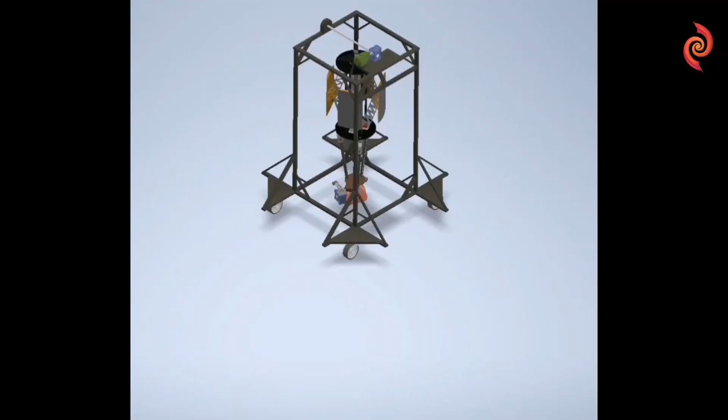Our Mission Oil Scavenging Bot consists of two main units, namely a standing unit and a drone unit. The standing unit is the one which supports the drone unit, and the drone unit is the one which gets inside the manhole, inspects the environmental condition, and is helpful in removing sludge or blockage in the manhole without any human intervention.

Standing unit, as you can see here, is the rectangular frame which supports the drone unit. Drone unit is the unit which enters the manhole and inspects the environmental conditions inside the manhole.

As our drone unit is suspended with a cable from the standing unit, there might be some oscillations during operation. In order to overcome these oscillations and for proper stable operation of the drone unit, a jack-like structure is used. Our jack consists of 4 limbs which provide stability by opening itself.

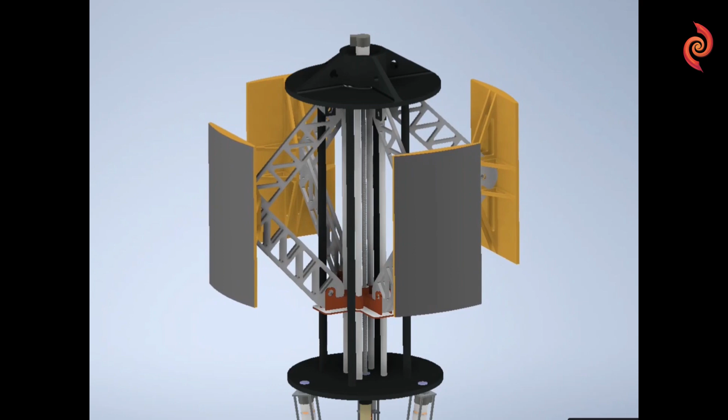Our jack consists of 4 limbs and operates through a lead screw mechanism. Once the jack enters the manhole, the lead screw rotates clockwise and all 4 limbs of the jack try to expand and get attached to the inner wall of the manhole.

In order to check whether the limbs have got fixed properly, a force sensor is used at the end of the limbs. When the limb touches the inner wall of the manhole, the force sensor at the end of the limb experiences certain pressure. This pressure, on crossing a certain threshold, gives an indication to the operator that the jack has got fixed.

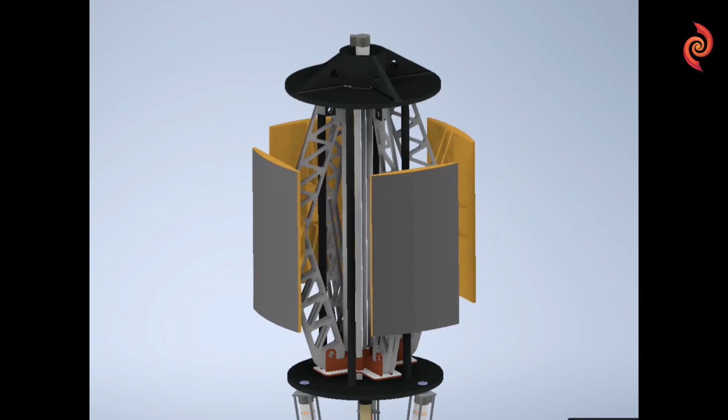On the other side, during retraction, when the drone unit is being taken out, the lead screw rotates anti-clockwise and hence all the limbs contract. In order to indicate to the operator whether the contraction of limbs has been done successfully, limit switches are used here.

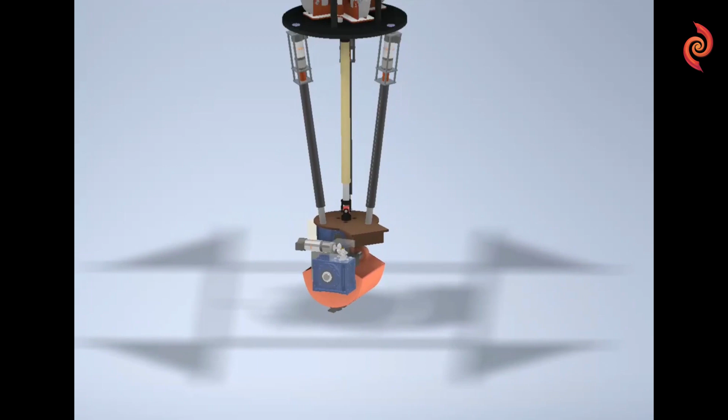This is the parallel manipulator of Mission Oil Scavenging Bot, which consists of 3 links, each link driven by a high torque N20 motor with an encoder for PID position feedback control.

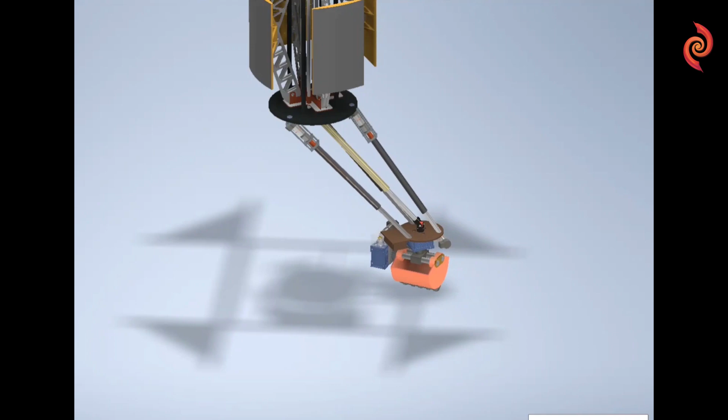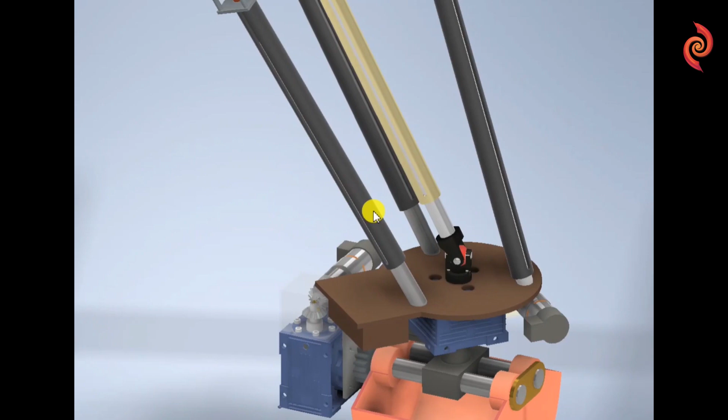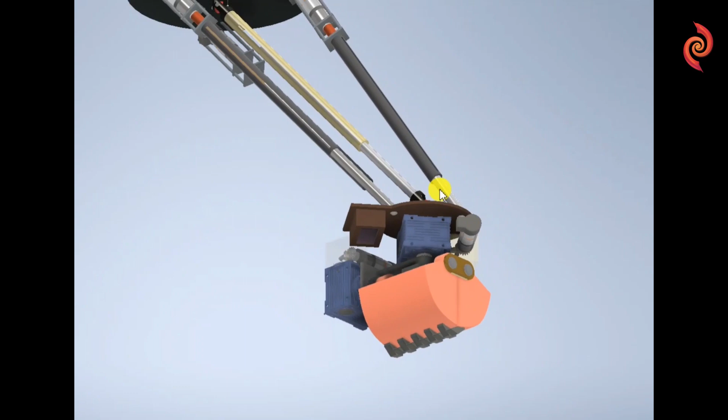This works on the basis of inverse kinematics, in which the desired position where the end effector should be is fed by the operator as an input, and the amount by which each link's length has to be changed is given as output. The result of inverse kinematics is then given to the N20 motors as input through PID control coding. Hence, each N20 motor spins at a different RPM and the lead screws connected to each N20 motor spin differently, thus achieving the target position entered by the operator.

To be brief, the links will expand or contract according to the operator's input, thus achieving the necessary linear or tilting motion and hence providing 5 degrees of freedom for the Mission Oil Scavenging Bot.

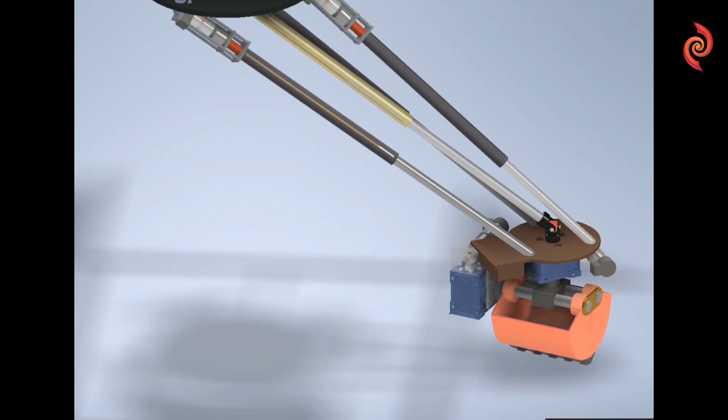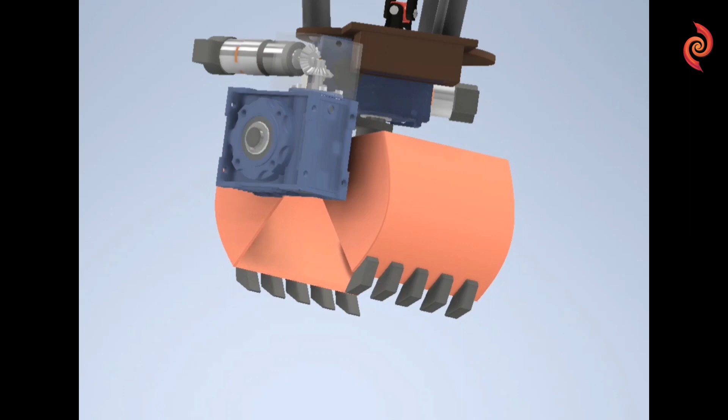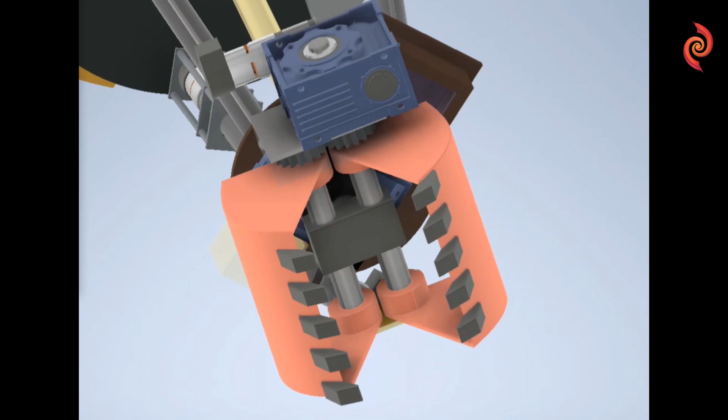The final process of removing the blockage or sludge from the manhole is carried out using this clamshell bucket end effector. This end effector has been chosen considering the characteristics of the waste and the environmental conditions inside the manhole. It consists of two claw-like structures which open and close according to the operator's command. The end effector is attached to the parallel manipulator through a high precision quad encoder DC motor, which provides an additional DOF to the 5 DOF structure. It also consists of holes drilled in it to drain water from the waste, reducing the excess lifting load.

This is the drone unit setup of the Manhole Scavenging Bot, which consists of a parallel manipulator and a clamshell bucket end effector at the bottom. Our bot consists of 6 degrees of freedom: 5 provided by the parallel manipulator and an additional DOF provided by a motor situated between the end effector and parallel manipulator. This 6 degrees of freedom makes the bot flexible to move anywhere in the manhole and remove the sludge effectively.

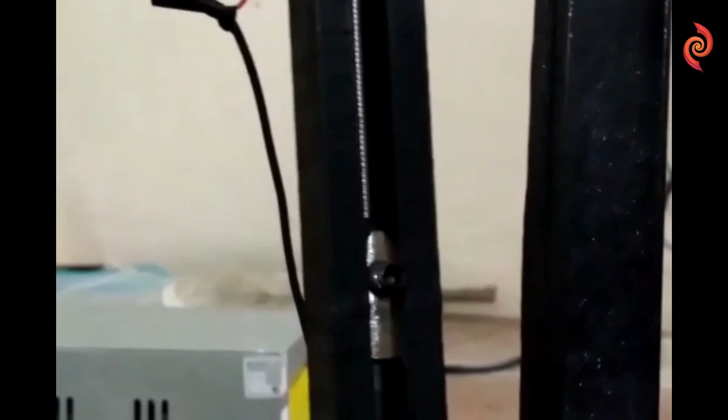You can see the 3 links in the parallel manipulator are driven by 3 high-torque N20 encoder motors through a lead screw mechanism. These motors work under PID control. Each motor rotates at different RPM in order to achieve the tilting action necessary to make the end effector reach the desired position and orientation, so the blockage in any part of the manhole can be cleaned effectively.

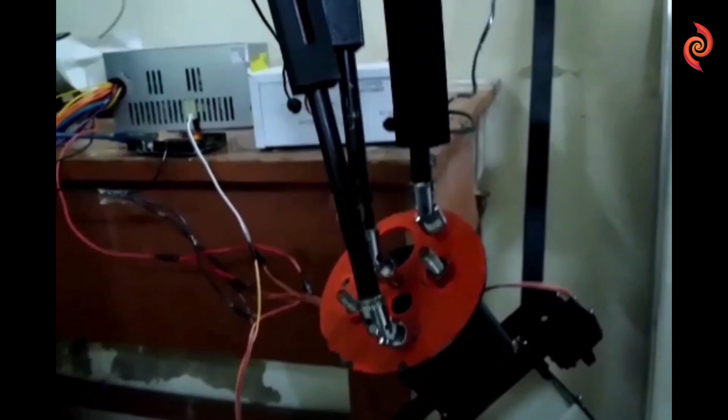The parallel manipulator works on the principle of inverse kinematics, for which the desired position and orientation of the end effector is fed as input through the joystick. The joystick values are passed into the inverse kinematics code, which provides the length to which each link has to be changed as output. This output is given to the N20 motors, and through PID, each N20 motor moves according to the inverse kinematic results.

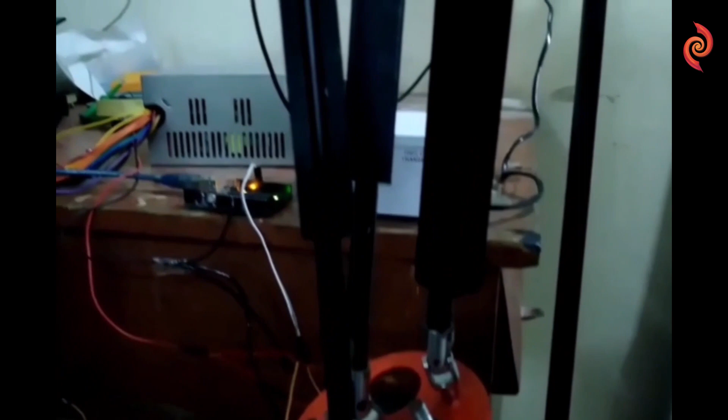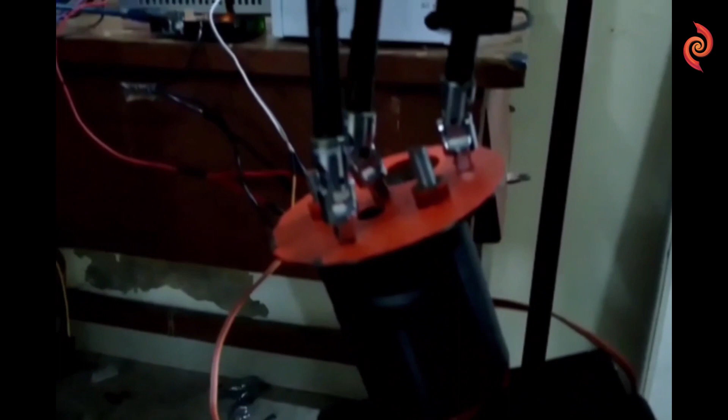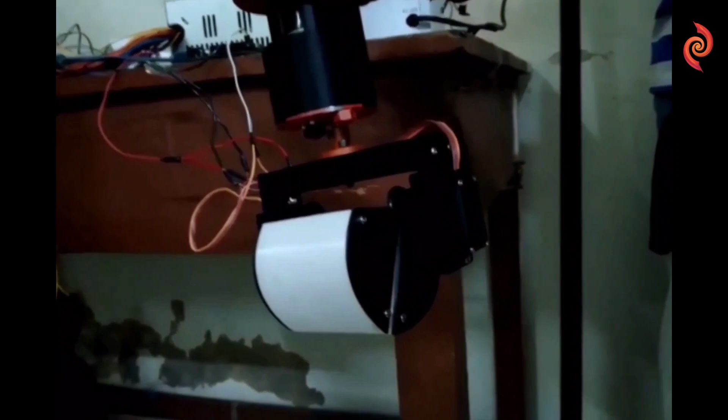Each link is driven by individual N20 motors. As these motors spin at different RPM, each link's length varies accordingly. The expansion and contraction of the links makes the clamshell bucket end effector achieve its targeted position to remove the blockage or waste from anywhere in the manhole, justifying the name Manhole Scavenging Bot. This end effector acts like a bird's claw, grabbing the solid sticky waste from anywhere inside the manhole with its 6 DOF. This high precision motor provides an additional DOF to the bot to rotate the end effector.

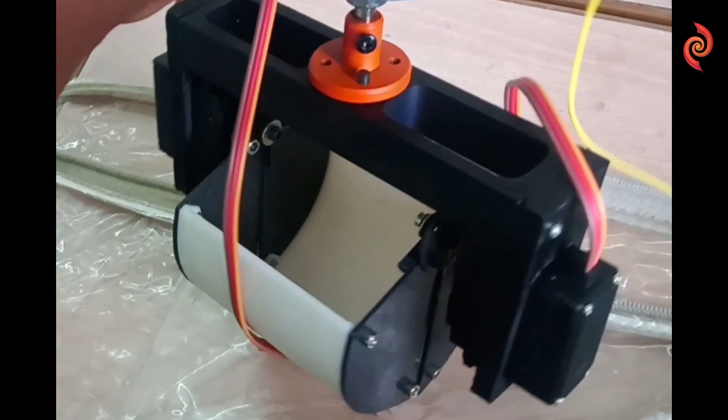The clamshell bucket end effector consists of 2 claws driven by high-torque servos, which open and close wherever necessary in order to remove the sludge effectively.

We are the design team of the Manhole Scavenging Bot project. I designed the structural element of the bot. I designed the parallel manipulator and did some fabrication work. I designed the jack and the end effector. I fabricated the structural element for the bot. I fabricated the jack and the parallel manipulator.

We worked on the robotics domain of the Manhole Scavenging Bot. I did the coding part for the motors using encoders. I worked on coding of the actuators using PID control. As part of the material science domain, we looked for coatings, casing for motors, and chose various materials for the components of the bot.

From the electronics and instrumentation team of the Manhole Scavenging Bot, we worked on the coding part. We used the ultrasonic sensor and force sensitive resistor, so that no man has to indulge in the act of manual scavenging.